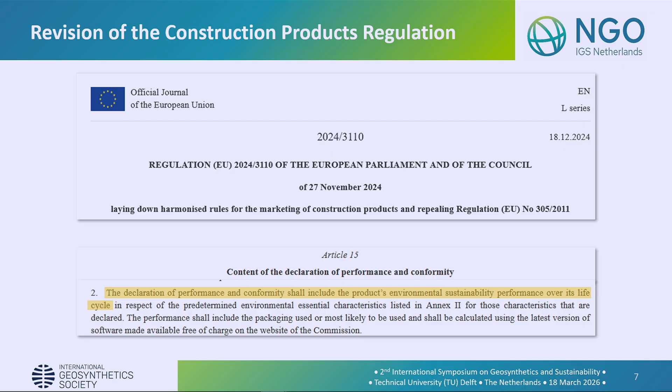In this regulation, it was also the basis for the so-called Declaration of Performance, which is now changed into the Declaration of Performance and Conformity, which will include the environmental sustainability performance. So it won't only be any longer for your technical parameters, it will also include...

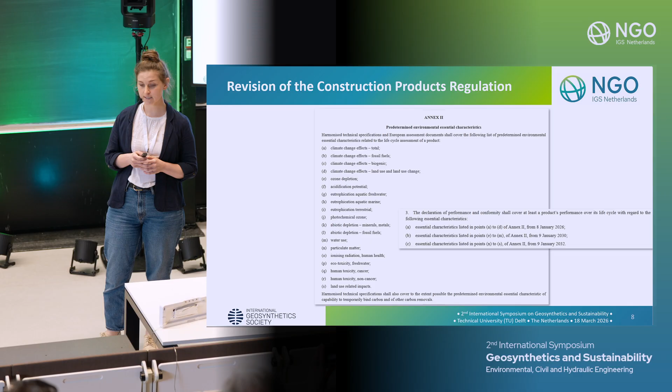as you can see, actually from January 2026, excuse me. It will also include climate change effects from right now, in fact from January.

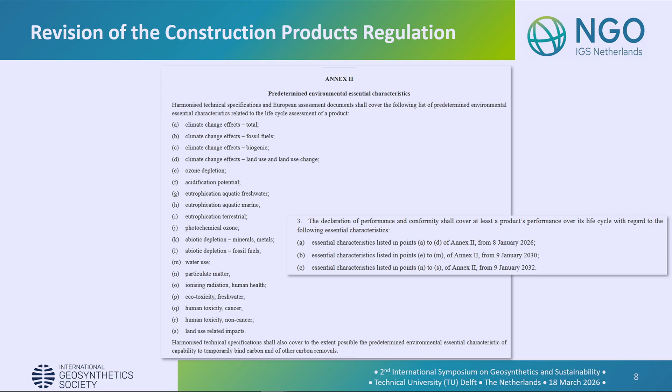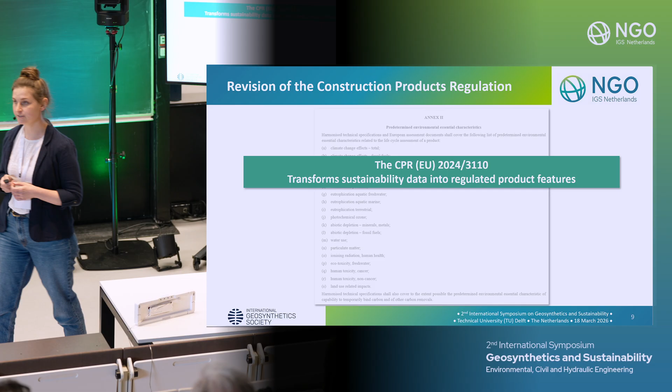So what does happen? We can state that the CPR transforms sustainability data into regulated product features, which is quite a good thing if you would like to push sustainability.

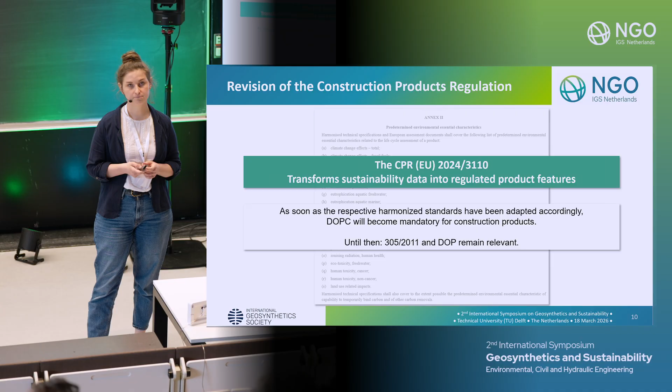There will be a delay because you not only have the construction product regulations, you also have the harmonized standards, which also need to be updated. Until all those harmonized standards are updated, the DOPs remain relevant, and the old product regulation, which is the product regulation with the number 305.

And you will see there is always some push into the right direction of sustainability. So it should notably take into account - and also the use of environmental product declaration is already encouraged. But there's no must, as it will be quite soon in the future.

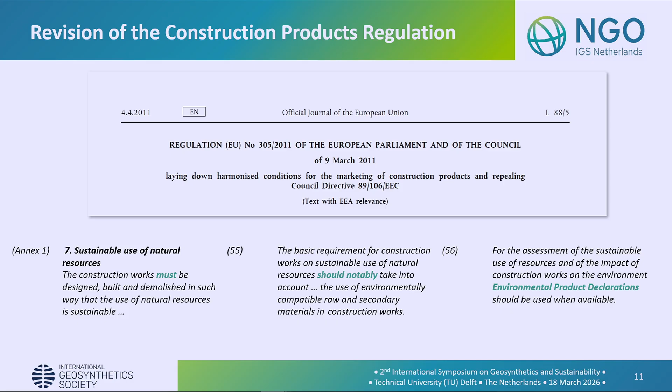The EPD, we have heard about it a little bit - the EPD is a document which transparently communicates the environmental performance or impact of any product or material over its lifetime. It's very important that this is a third-party verified document.

So no construction material supplier can do their own EPDs. It must be a third-party verification. And also, if a product holds an EPD, that does not necessarily mean it's an environmentally friendly product. It only says the product has been assessed based on that information. And also, there are the guidelines we have seen already before.

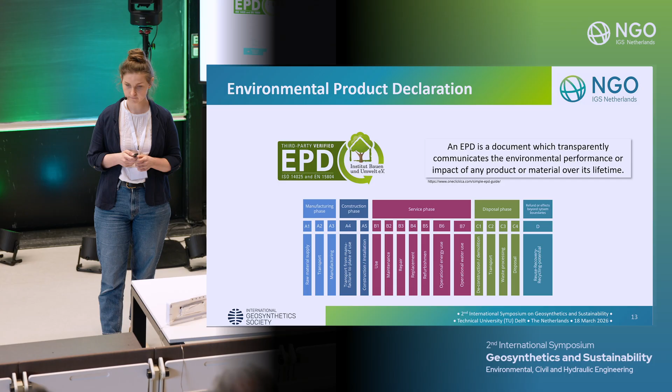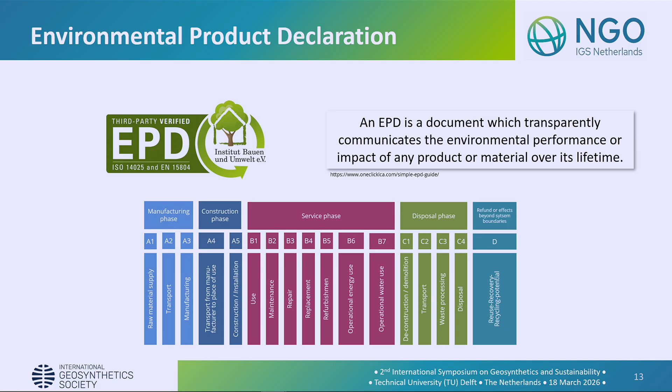And this is what we have seen in Wim's presentation already. This is the life cycle from A1 to actually life cycle phase D. We will later circle back to the EPDs again.

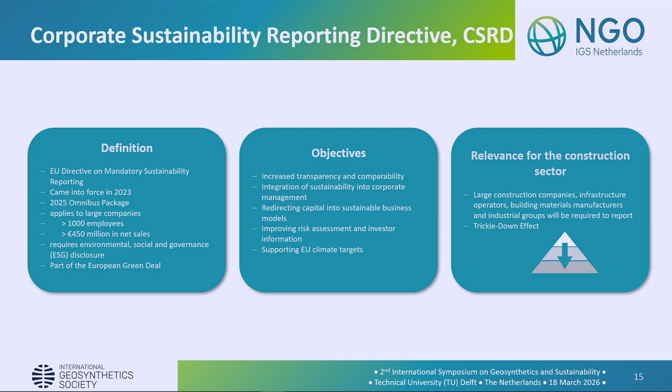But now we would like to go to the Corporate Sustainability Reporting Directive, CSRD. This is, or will be, or already is, a mandatory sustainability reporting, equivalent in importance to the financial reporting of each corporation. It came into force in 2023, and this year will be the first year where reporting companies have to report on environmental, social, and governance sustainability. It's also part of the European Green Deal, and should increase transparency, comparability, and integration of sustainability into corporate management.

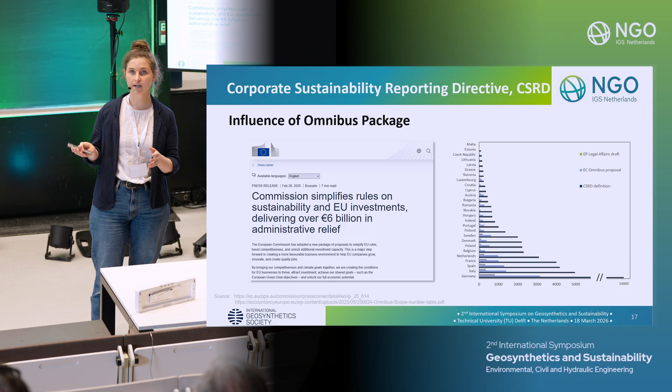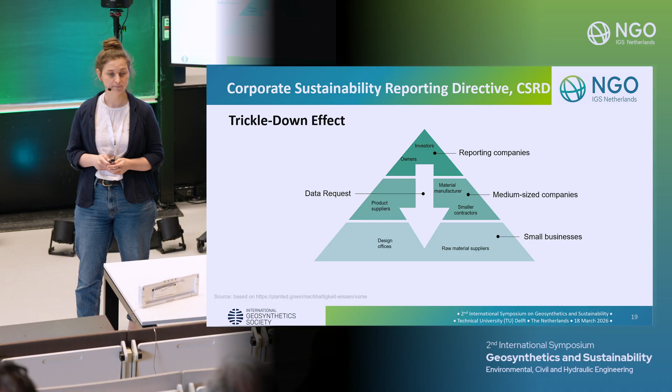But still, there is something called the trickle-down effect. There will be reporting companies at the top, but the information they require is requested from medium-sized and smaller companies along their value chain. This has to do with the way those balances are made. No matter whether you're an investor, product supplier, or a design office, you will be asked for information, because of the way those balances are made, which is the greenhouse gas protocol in most cases, an alternative to ISO. It's very comparable and compatible with the CSRD.

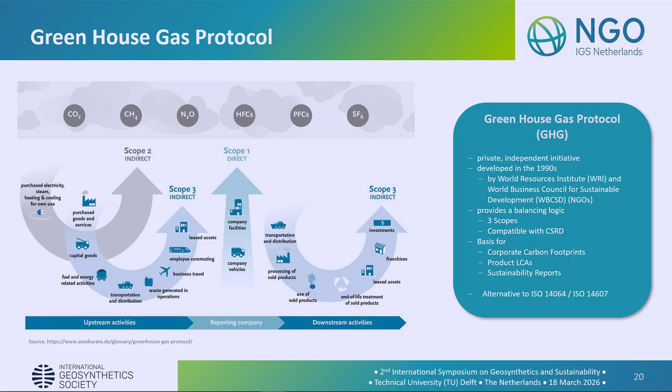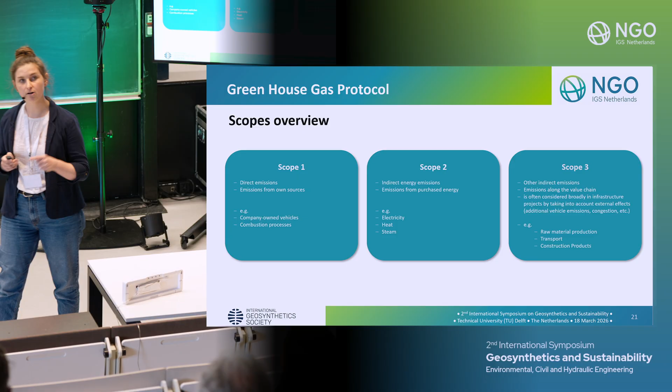What you can see here is that there are actually three scopes considered. Scope 1 is what you have inside your company, the company facilities and your company vehicles. Scope 2 is indirect energy emissions, emissions from purchased energy like electricity, heat, steam. And then, very interestingly, scope 3 is all other indirect emissions along your value chain. That means everything, if goods are purchased, if goods are transported, everything you can see on this graph becomes the input of scope 3 for a reporting company.

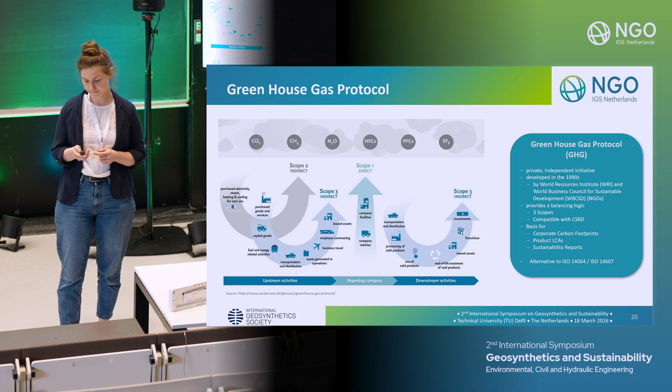And for infrastructure projects, this is even extended by what is so-called external effects. We will see this later as well.

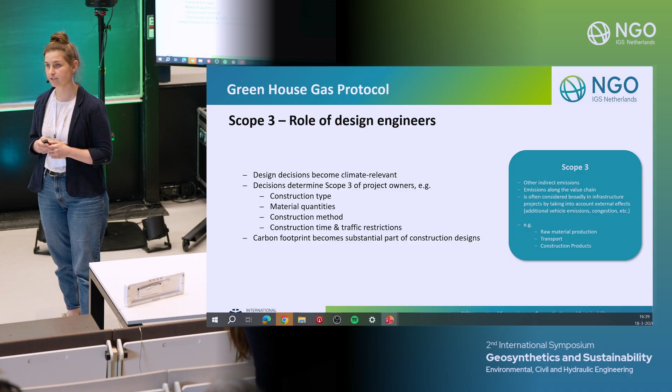So if you're working in a design office, this brings you into a very special position, because design decisions become climate relevant. Very early in the process of a project, you will be required to share data, because construction type, material quantities, construction method, construction time, and traffic restrictions all become the input for your project owner, if this owner needs to do the reporting.

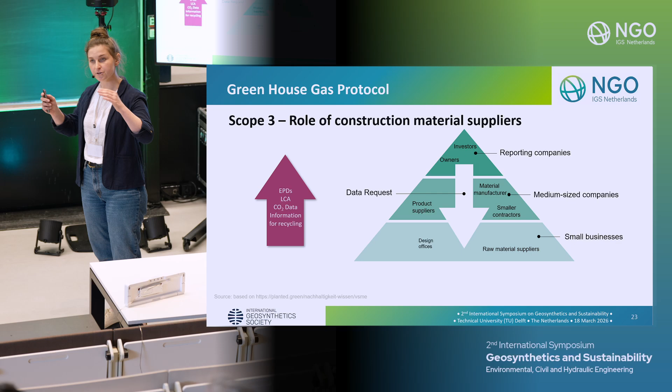And also, for me, working for a geosynthetic manufacturer, this also means that we need to get data for our products, like EPDs, LCAs, CO2 data, information for recycling. Everything is needed, because it's somewhere in scope 3 of another company. So this is what we call the trickling down effect, the cascading effect which results from that.

But if we have this data, we can also do nice things with it. We could, as we have seen today, show very beautiful examples of geosynthetics bringing special benefits to construction projects in terms of environmental impact, as was done in a pilot project at Stokkumer Straße.

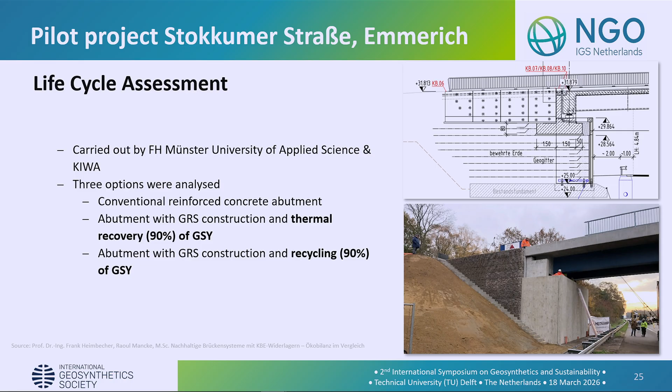If you have seen any presentation of my colleagues lately, you've probably seen this before: a bridge abutment close to the Dutch border. I don't want to bore you with the technical details, because you're all very well aware of how to design a geosynthetic reinforced structure as a bridge abutment. I would like to jump directly to the life cycle assessment, which was analyzed here by Fachhochschule Münster and KIWA.

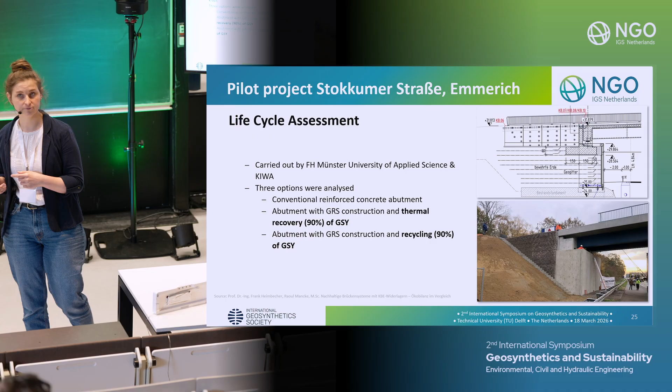There were three options analyzed: the conventional reinforced concrete abutment, the abutment with geosynthetic construction under the assumption of thermal recovery, which is a fancy word for burning the geogrid after its use, and the abutment under the assumption that we could recycle it by 90%. This is the result, and we have seen this also aligns very nicely with the case studies we have seen earlier, that there is a significant reduction with geosynthetics.

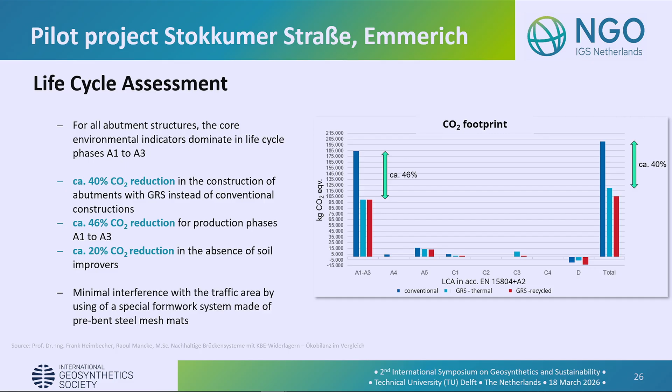As you can see in the graphic, you will find all those life cycle stages from A1 to D, and we can see that most of the carbon footprint results from A1 to A3 for all options. But there's also a significant reduction with geosynthetic solutions compared to the conventional solution, by 40%.

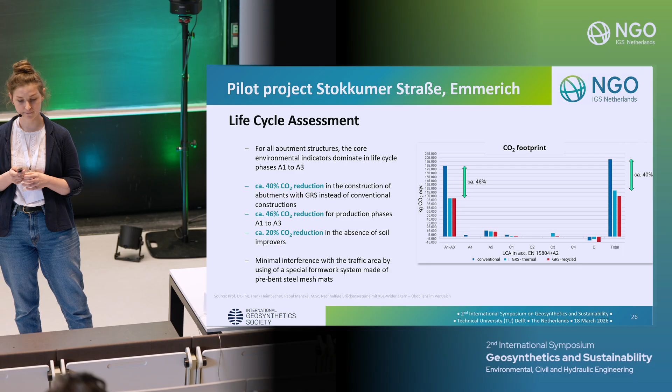What was very interesting in this project was the construction time and the influence on traffic. This is a motorway, so there were no traffic restrictions on the A3 during the construction work itself. There were only two full weekend closures required, when the bridge deck was placed on top.

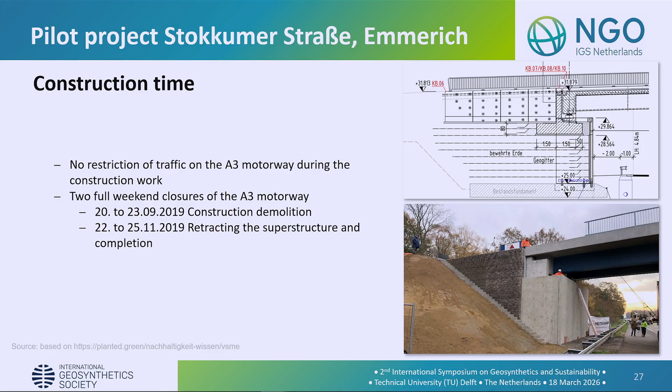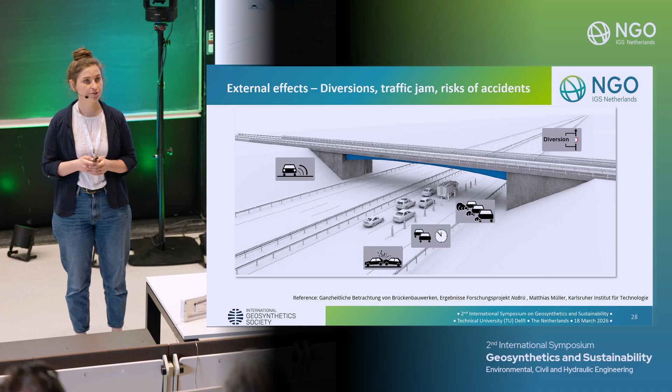This is interesting because we have heard before that in our environmental balancing there are also so-called external effects that could be included, like the risk of accidents, more emissions because cars go slower, more traffic jams, diversions, noise. This is a beautiful study from Matthias Müller from Karlsruhe in Germany. He did not do the analysis for geosynthetics, but for bridges in general, but I think all the methods can also be applied for geosynthetic solutions. What he found was that there are life cycle costs, structure related, as well as external effects related. It's quite interesting that all those effects, like changed or diverted traffic and reduced velocity of vehicles, have a major influence on the results for your life cycle costs.

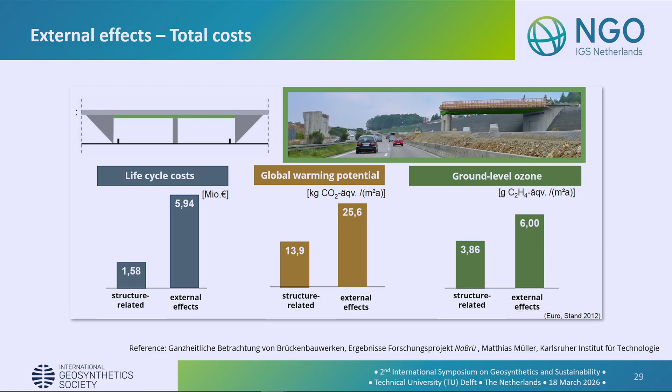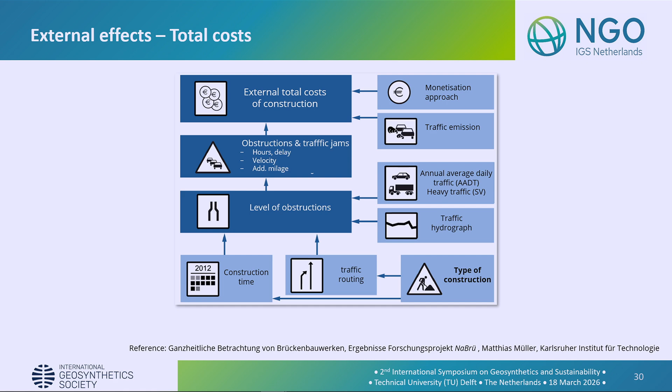He also presented a model, a building information model based approach. So it's a very sophisticated way of doing all those balances in an automated manner, which I think is a very intriguing approach, so that the external total cost of a construction can very easily be calculated using those methods. There's also a monetizing approach connected to that, which you can see on the right-hand side.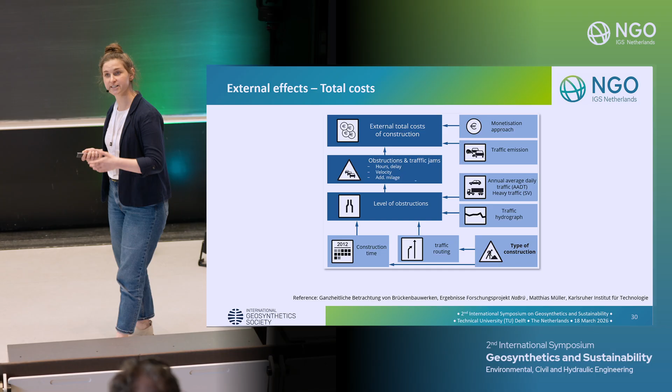So I was wondering then, when we have clearly benefits using geosynthetics, clearly benefits in construction time and all this, where are, in Europe, all the project owners who want sustainable solutions? What's going wrong? Why haven't we seen an increase in demand for geosynthetic solutions? Does it have something to do with procurement, was my question, which led me to the next strategy I found from the European Union, the green public procurement.

It's not mandatory under EU law, but it explicitly allows environmental criteria and life cycle costing for procurement methods. But the problem is, across member states, the level of introduction or implementation really varies a lot. I was also surprised at first - I thought it was a funny incident that the color scheme from the green public procurement is quite similar to the NGO.

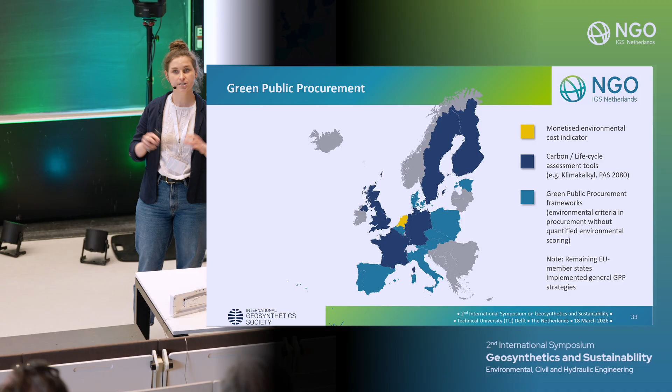But then I thought, no, it can't be a coincidence, because you are actually living in quite a pioneering country - the Netherlands is the only country that connected the methods for doing life cycle assessment and carbon footprint analysis with the monetizing approach. This is very unique in Europe. As you can see, other countries like Sweden are a good runner-up, then Germany, Spain, UK, though it's not EU any longer. So there are tools, but the Netherlands is the only one with the MKI that Wim nicely presented who can do that. The other countries in light blue and gray here just have some strategies, or general GPP strategies, but no further step.

So while we're waiting for all those countries to catch up, maybe we can send Wim to each and every country in the European Union to explain how this is done properly, so that we really get the laws and get going with this. We could use the time to put ourselves to the stand - okay, we are better than others, but can we do even better than we are right now?

So then we go back to our pilot project and look at where the emissions within the geosynthetic reinforced structure come from. Here it was a special case - there was also a hydraulic binder in it, which can be removed, because we know we can build geosynthetic reinforced structures without a hydraulic binder. This was some conservative German checking the design who wanted it, but we can do without it.

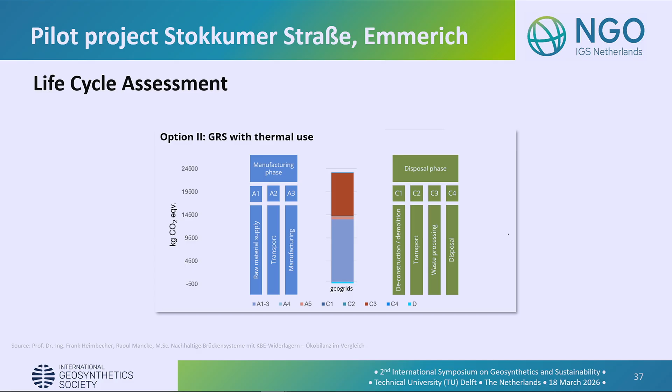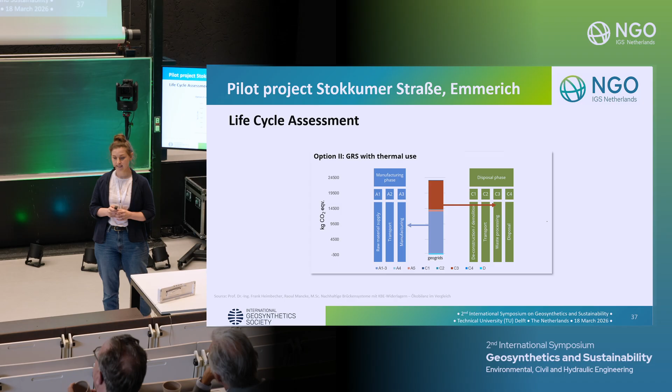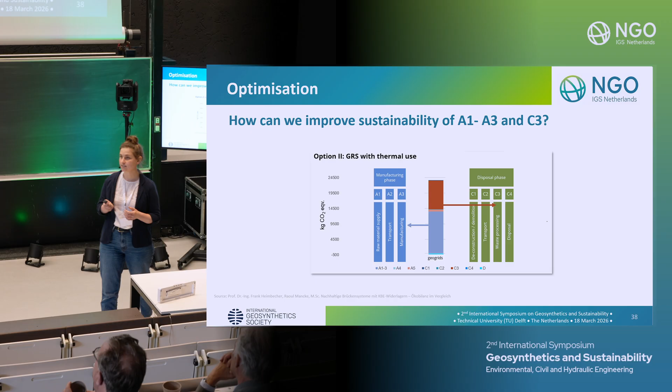So when we then only look at the geogrid, and the colors represent again our life cycle stages, we find that a high proportion of our emissions come from A1 to A3 - really the manufacturing phase, the geogrid itself - and the other proportion is the waste processing. So the big question is, how can we improve the sustainability from A1 to A3, or to C3? What can we do? I think we've discussed it earlier - everyone has already dipped into it a little bit.

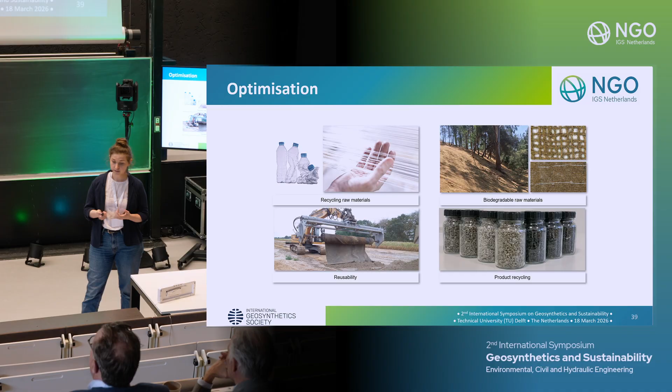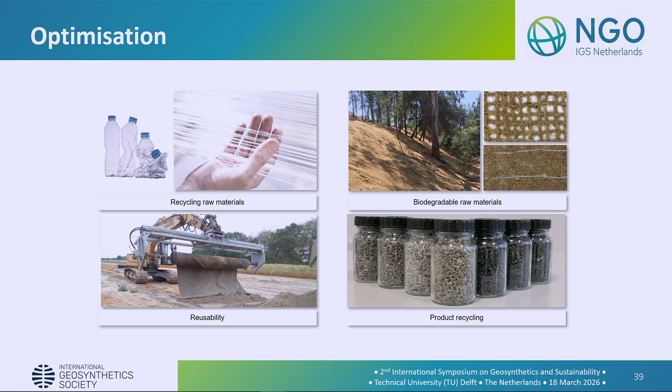We could, for instance, explore options of using recycled raw materials, biodegradable raw materials, or explore options for reusability or product recycling. Biodegradable raw materials at the moment have the big problem that they are biodegradable. So for reinforcing things like bridge abutments or slopes, we want a precise prediction of our strength for a given service life, and biodegradable raw materials at the moment can't provide us with that. But of course, there is a lot of research going on, and I hope there will be another solution.

What about recycling raw materials? There was a short discussion this morning with Professor Koerner's presentation, and a question from the audience: how about recycling raw materials?

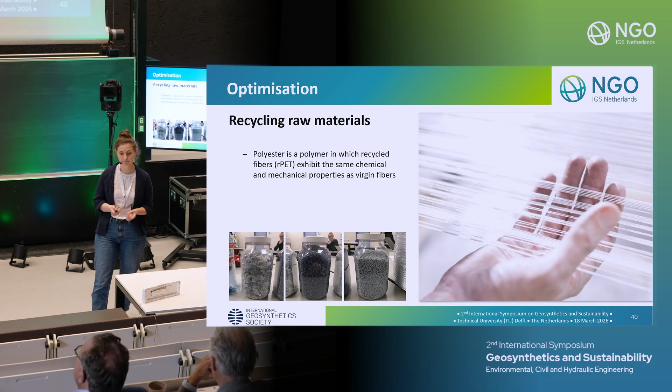When thinking about reinforcing products made from PET, we have a very beautiful thing: polyester is a polymer in which recycled fibers exhibit the same chemical and mechanical properties as virgin fibers. So if we look into the tensile strength test, we are not able to distinguish between products of recycled fibers or virgin fibers.

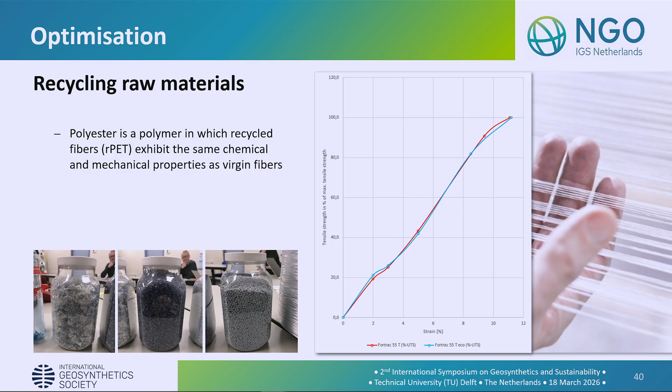And also there are already predictions about the service life related to creep and other long-term analysis. So actually we would be ready to go with material made from recycled fibers, but there is a catch - we already talked about this morning.

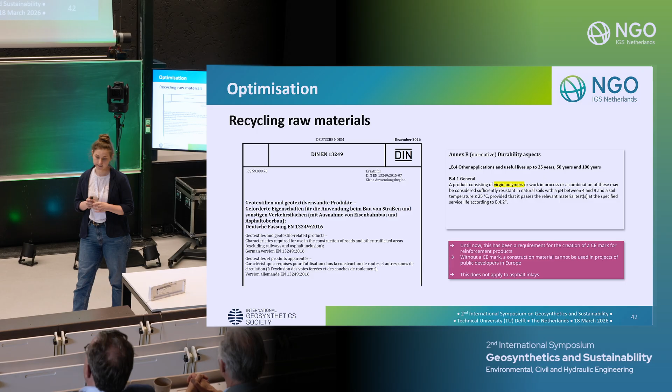The catch would be the harmonized standards, exactly the ones that need to be updated for our Construction Products Regulation. This says that materials with a service life up to 25 years can be used from virgin fibers. If we look into long-term applications of a reinforcing product consisting of virgin polymers, that means until now we cannot get a CE marking for a geosynthetic made of recycled fibers for use of more than 25 years, in fact.

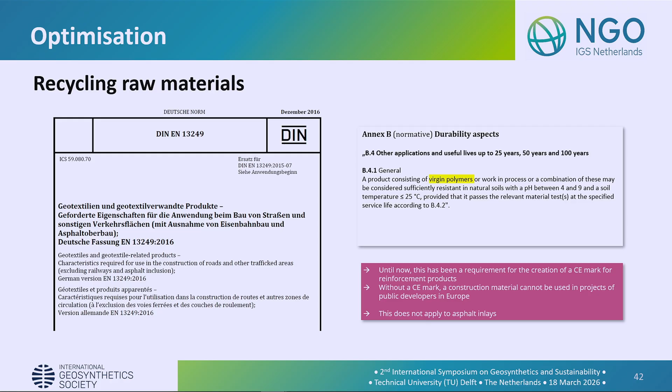So, luckily, this does not apply to asphalt inlays, because this is another harmonized standard.

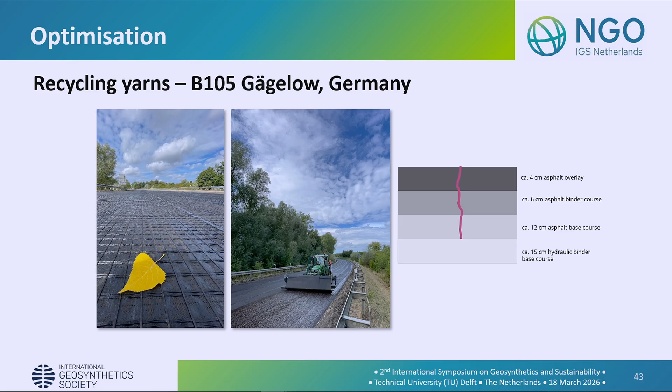I can show you an example of an asphalt inlay made of recycled fibers from the eastern part of Germany. Here the asphalt overlay and the asphalt binder were removed in order to rehabilitate this reflective cracking, what we do with asphalt inlays. So it was removed and asphalt reinforcement made from recycled polymers was installed.

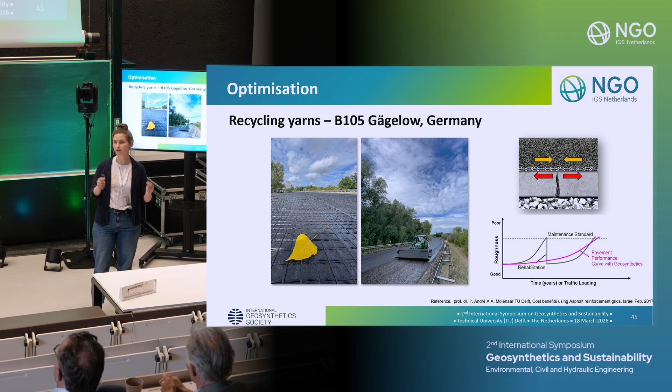And if we go back to the idea of an asphalt reinforcement, which is to extend the service life, the use of an asphalt reinforcement is already a very sustainable idea because we can extend service life, and if we can combine this with a recycled material, it gives us even higher benefits.

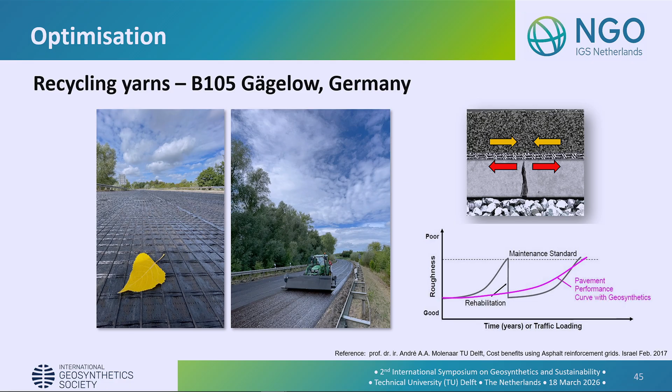How about recycling of geosynthetics? There's also research going on. The big challenges at the moment are that we have destructive removal - we need a very careful excavator driver who pulls the geogrid off from where it's used. Then there is mixed material composition: if the geogrid has a coating or additives added into the mix, it's really difficult, making it harder to recycle. It's easier if there's a single origin polymer.

Then there is contamination from soil - we have to clean the material. And there's also a lack of collection and recycling points. What would be required is a network all over Europe where you can bring your geotextile for cleaning, for shredding, for reuse. Current regulations, we have heard about that already.

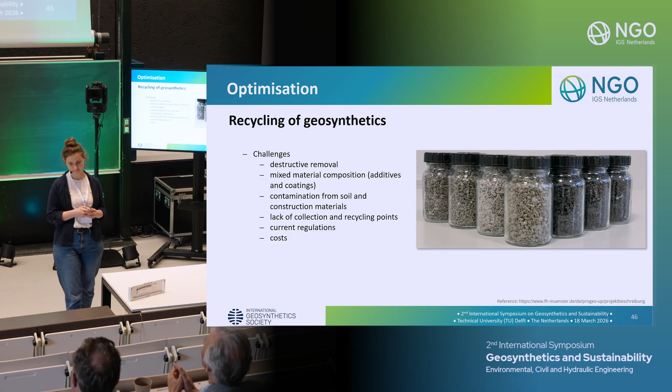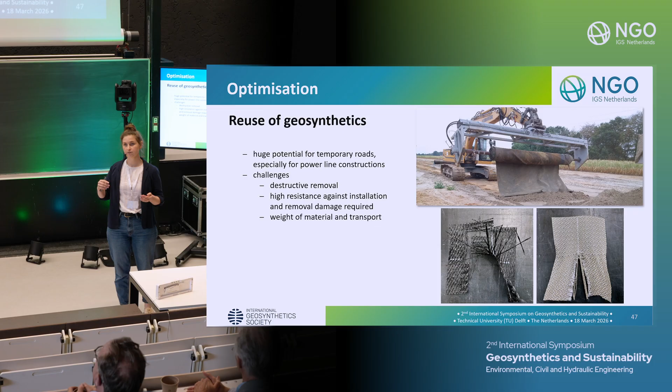However, again, we need careful removal, and we also want very high resistance against installation and removal damage multiple times. Most of the time, if we know we lose strength by installation damage, we add strength to it.

But of course, we don't want our products to have too much strength, because strength means additional weight, and additional weight means more CO2 while transporting. So we don't want the benefit to be eaten up by the additional weight. And we don't want the material to tear into thousands of particles, because then we get the problem of microplastics and all this. We want a nice coherent material, which is also what the ongoing research is looking at.

So now my summary. The European Sustainability Framework allows and encourages tools and guides to apply environmental criteria and life cycle costing for road infrastructure projects. However, the update of the harmonized standards will cause a delay in the implementation of the CPR 2024, and we would also require an update to allow the long-term application of secondary raw materials for geosynthetics with reinforcement function.

The Corporate Sustainability Reporting Directive we looked into influences smaller contractors, designers or manufacturers due to the Scope 3 emissions of project owners and the so-called trickle-down effect. The incorporation of the Green Public Procurement directives into national laws varies across member states, and this is something we really would like to change quickly.

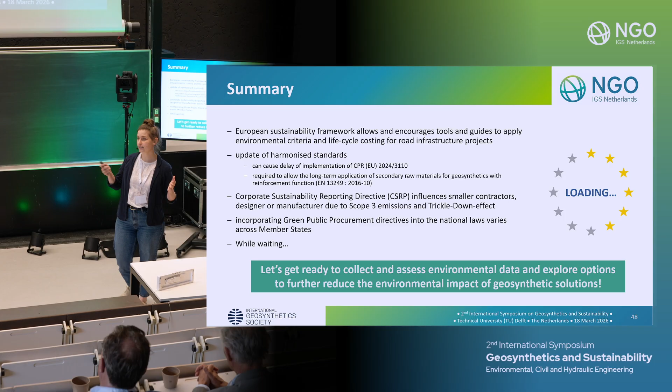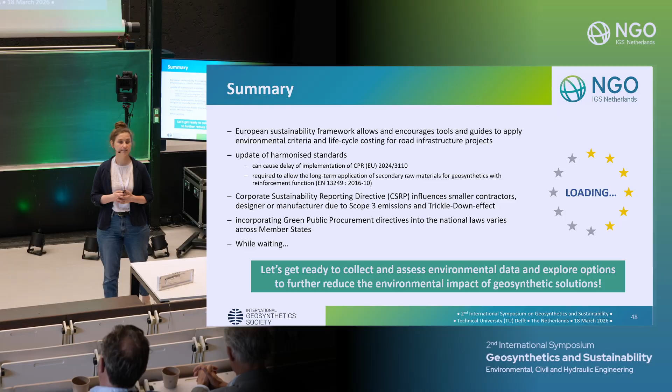But while we are waiting, I think all the other speakers today have shown very nicely that they are very interested in even improving geosynthetics to tackle all the challenges that come with the climate crisis. So let's get ready to collect and assess environmental data for geosynthetics and explore options to further reduce the environmental impact of geosynthetic solutions. We all have one common goal, and I think it's time to start.